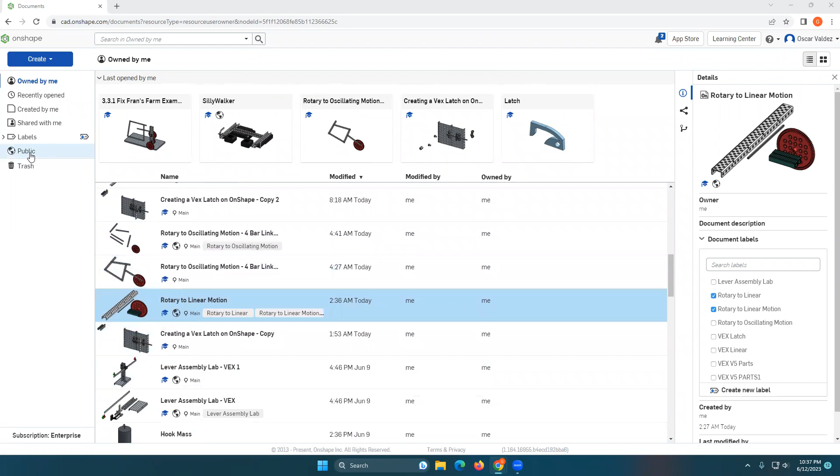We are going to create this rotary to linear motion assembly on OnShape with VEX components. If you do a search in public of rotary to linear motion, you should find the one that I've created here for you so you can copy this to your own account and follow along with this video. Let's go ahead and jump right in.

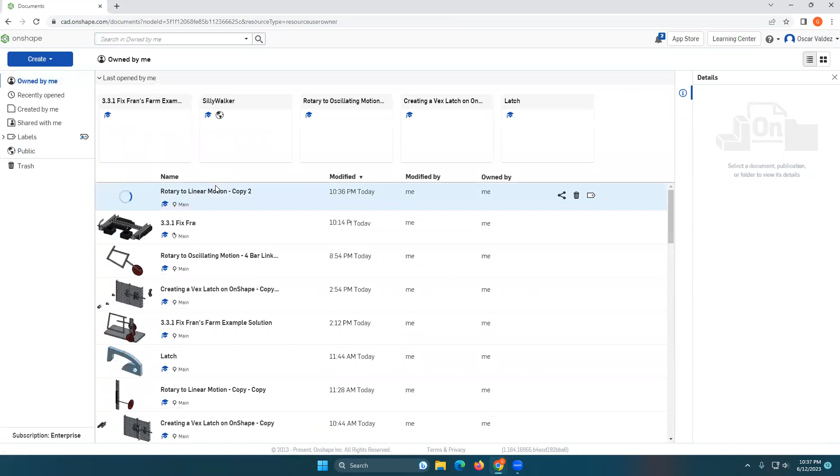So I'm going to head back here. I have created a copy of it. If you open up your copy and you don't see anything, go down to assembly. And here are my components. First thing I'm going to do is I am going to take these racks and I'm going to place them onto this C channel. There is a linear motion kit with VEX, but I didn't happen to find it in the library when I first initially did this. But I also didn't search very hard.

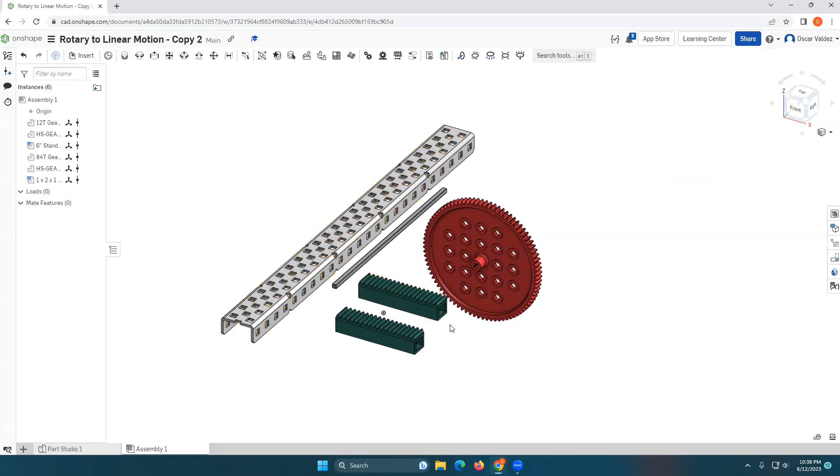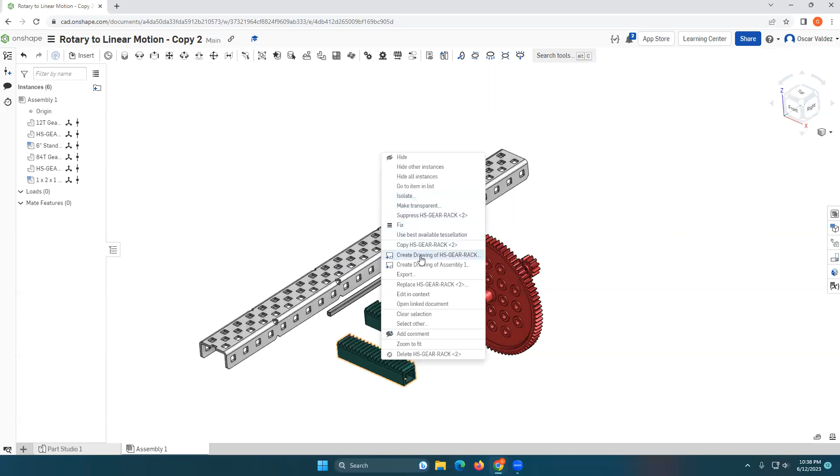So anyway, the whole idea here is to understand how we can create linear motion from rotary motion. And so I'm going to go ahead and just demonstrate that with these components here. So what I'm going to do is add a couple of additional racks. I'm going to right click and I'm going to copy and I'm going to paste. These parts I did not find in the VEX library that we downloaded previously. So what you can do is you can actually search for HS-gear-rack in the public library and you should be able to find these components here.

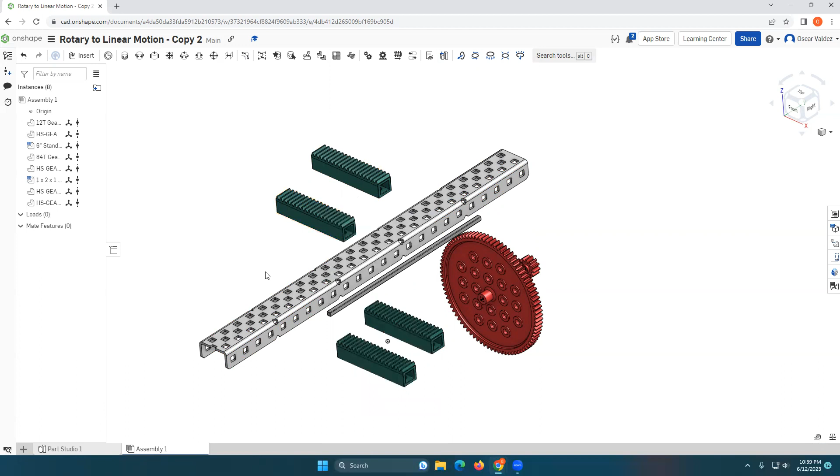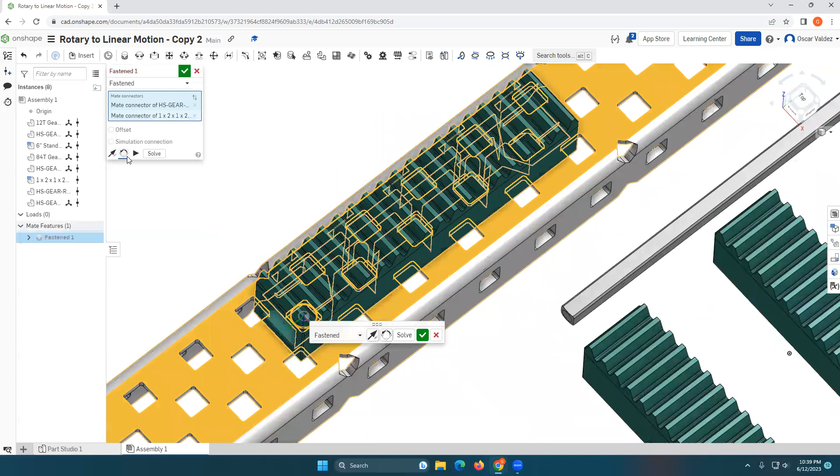All right, so what I'm going to do is I'm going to go ahead and just do a fastened mate between, let's say, the center of that and the center of, I'm going to hold the shift key again and grab the center. I'm going to do a quick rotate, click OK. I am good to go, and all the holes should line up. Beautiful. All right, I'm going to do the same thing for the other ones.

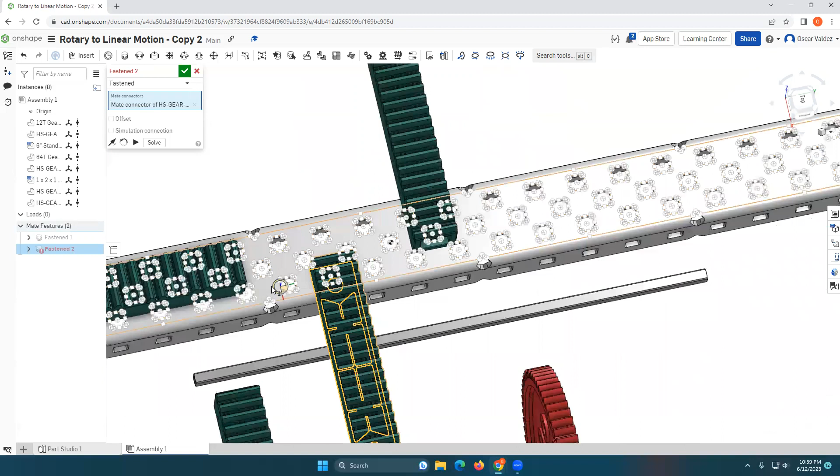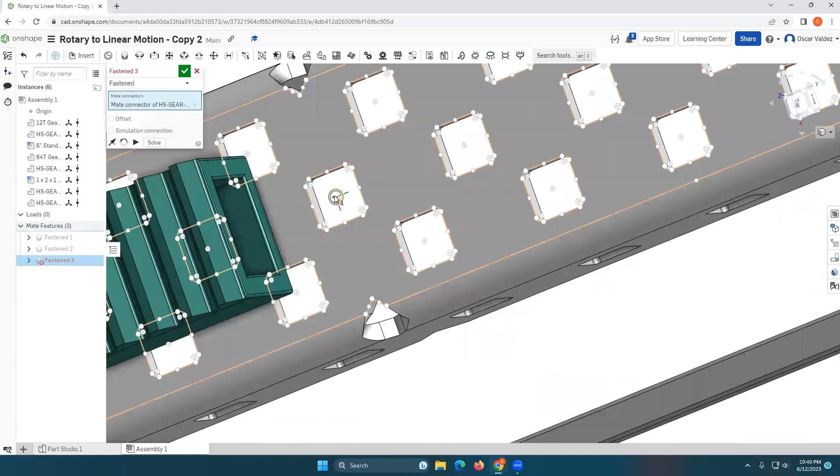I'm going to do a fasten mate. I am going to snag the center of that by holding shift. There we go. And then I'm going to hold shift key and snag the center of that. Rotate, rotate, rotate. Beautiful. And then I'm going to go ahead and do a fasten mate. Grab the center of this one here. And then place it holding shift. Grab the center of this one. Rotate, rotate, rotate. Check mark.

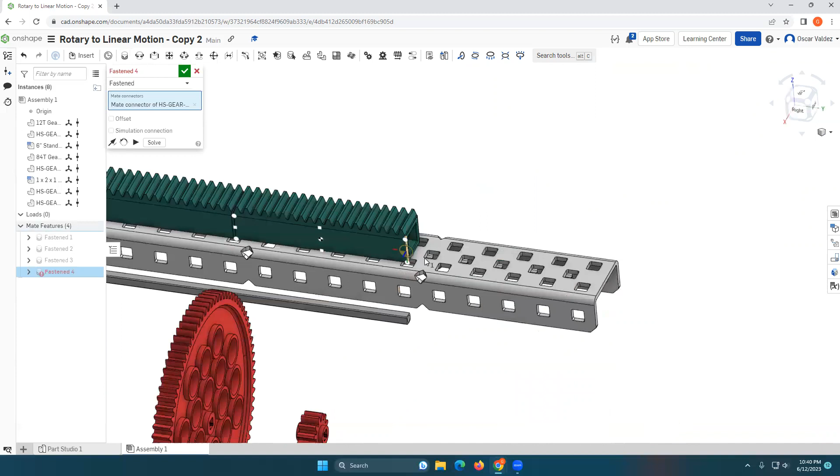And I believe I have room for one more on the other side, so I'll go ahead and add this one. Revolve, or not revolve, excuse me, fasten mate. Anyway, we go to select the center of that. And then the center of this. Fantastic. Let's rotate, rotate, rotate. Beautiful. Okay. So one of the things I can do, let me get the gear out of the way.

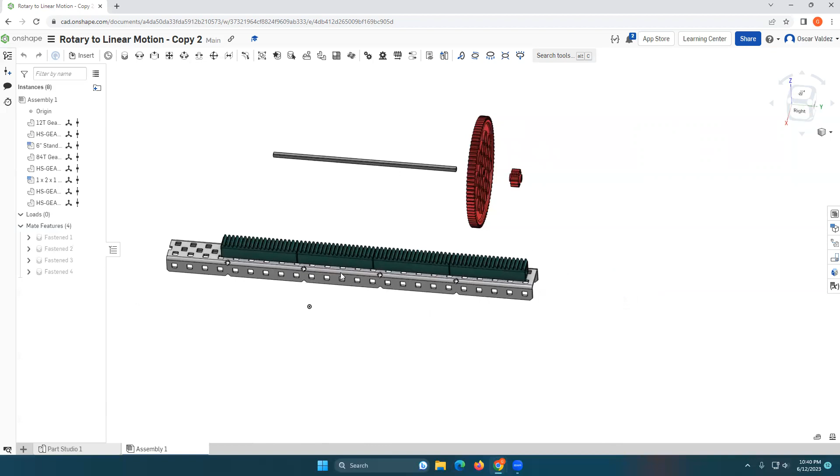The little gear and this axle, this shaft, is I can go ahead and create my slider feature. So I want this to slide left and right. So I'm going to go ahead and select slider mate. And what I'm going to do is I'm going to just grab the face of this. I'm going to click that. And I want that face to slide. We have this beautiful origin point here.

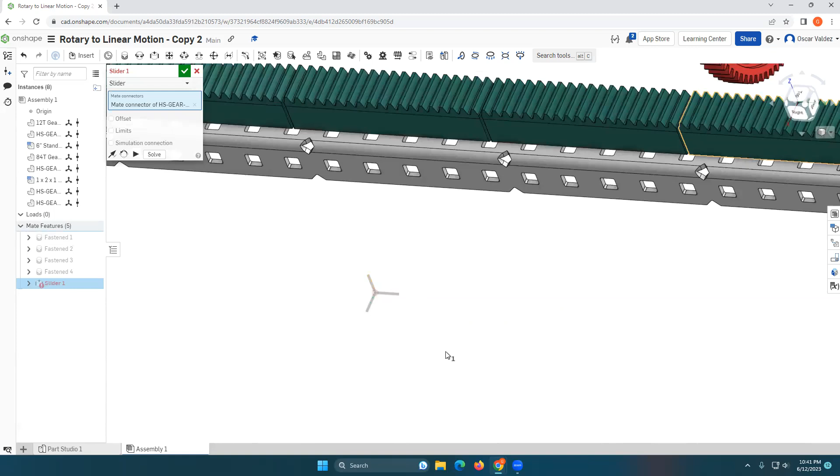As I hover over this origin point, I see that I've got these axes that I could select. I mean, hold shift key. So that way, if I move my mouse away, I still can see those. So I'm going to go ahead and allow it to slide on this axis here. And then I'm going to click OK. And when I do that, this has the ability to slide left and right on that axis. And that's it. Okay. What I can do is let me go ahead and click on slider.

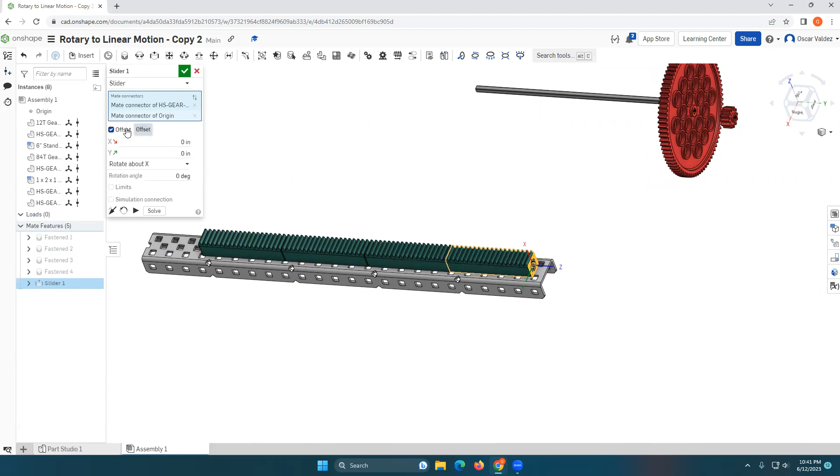Let me see if I can do an offset. And I'm going to drop this down just a tad the other way, just so I can get it out of the way so I can access this later on.

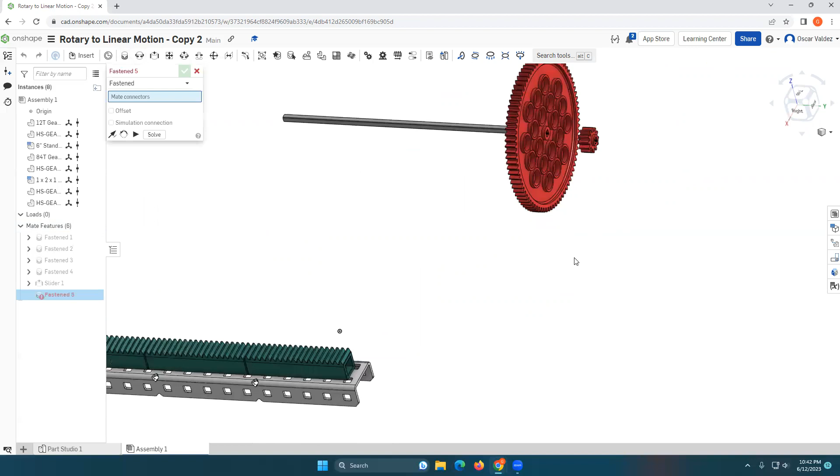All right. What I'm going to do now is I'm going to fix these gears onto this axle by using a fasten mate. I want the axle and the gear to rotate as one. And so I am going to fasten them so that they move together. And so let me rotate this so I can see this side. There we go. Hit OK.

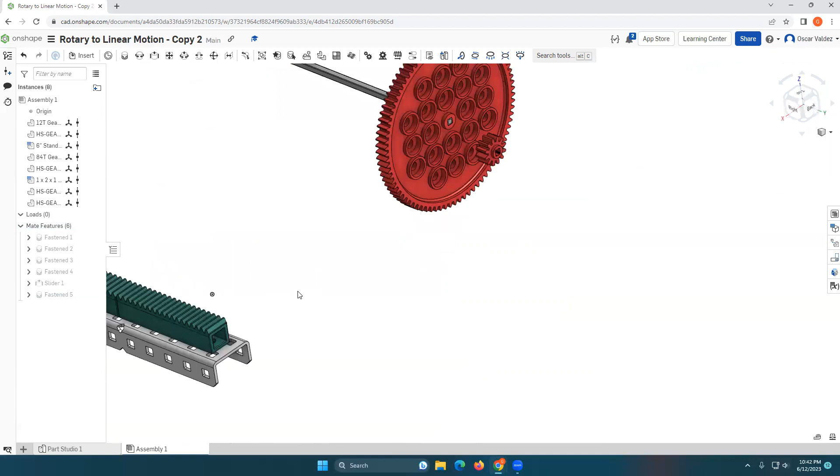And then I'm going to do the same thing on the other side. So I'm going to do a fastened mate. And I'm going to select that. And bring that over here. I'm going to flip it. There we go. Okay.

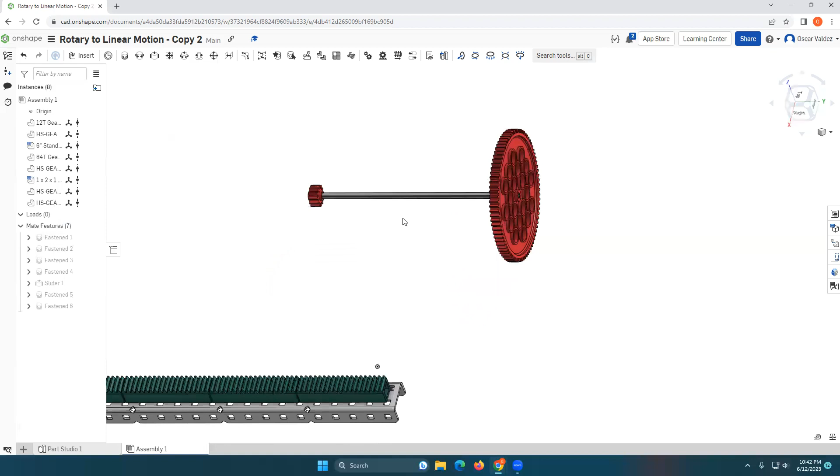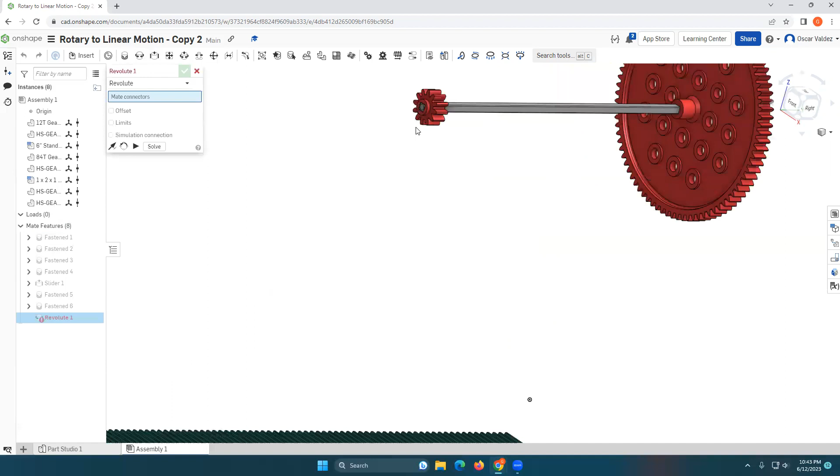Now what I want to do is I want this to revolve. I'm going to create a revolute mate, so that way this can rotate in relation to a plane. So what I'm going to do is use my origin again to create that revolute mate between the center of this. And this is going to get tricky, so make sure you select the right plane.

I want the plane, imagine you slicing this right down the center here. So you see how this circle is kind of slicing this in the middle? We want to ensure we select that plane from this origin. So this is laying flat on the ground. That's not the plane I want. So let me hold the Shift key.

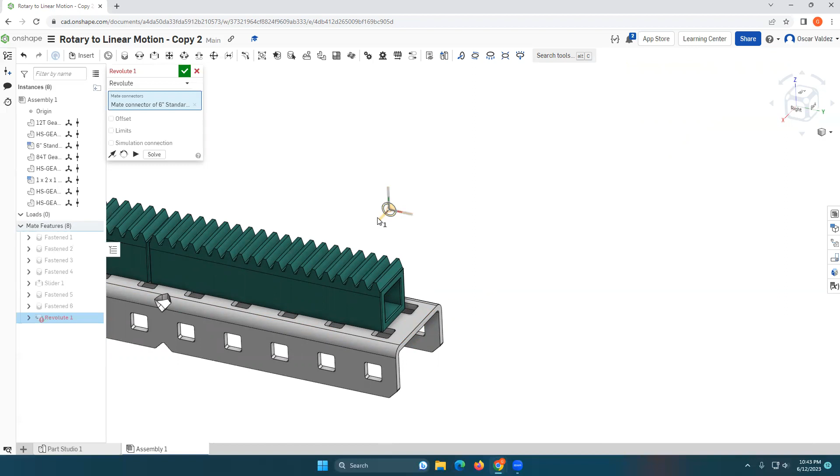And as I move around, I can see the planes generate. And what I want is this plane here. So let me go and click that. Click OK. Let me go ahead and see if I can flip this. There we go. Okay. I'm going to flip that the other way.

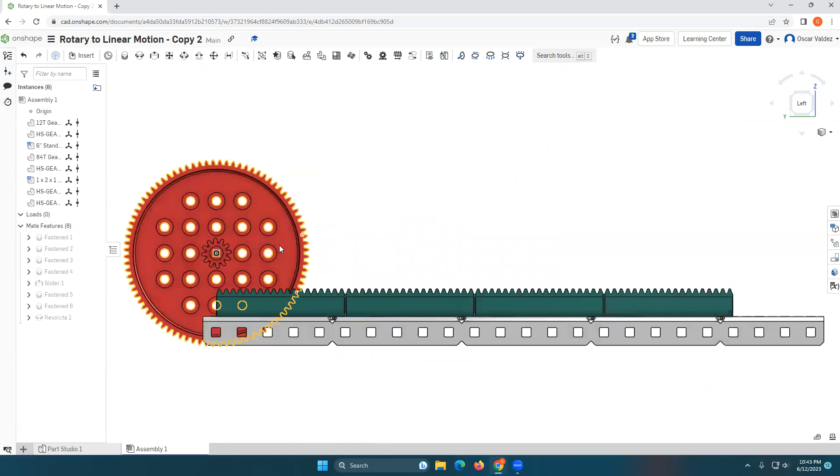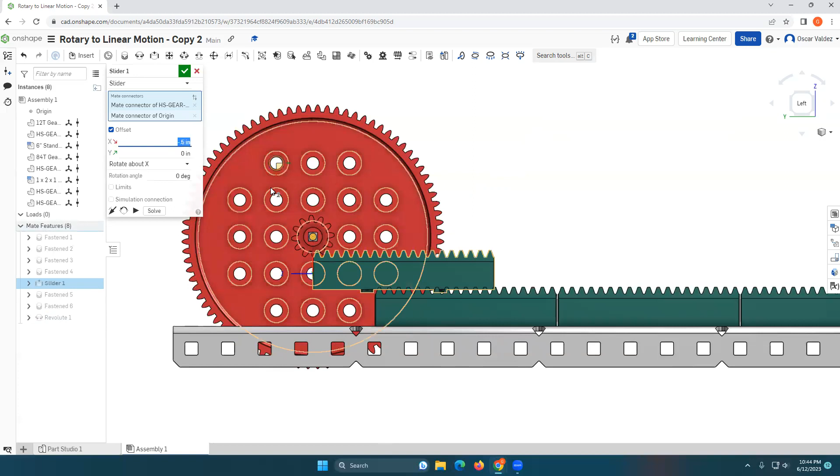Now what I'm going to do is take a look at this from the back side. And I'm going to slide this over. And I'm going to double click or right click, edit my slider feature. And remember, I brought that offset down. What I'm going to do is bring it back up so that the gear teeth mesh together. So I'm going to do negative, let's try 0.5, see what happens. Ooh, let me click OK and see what that does.

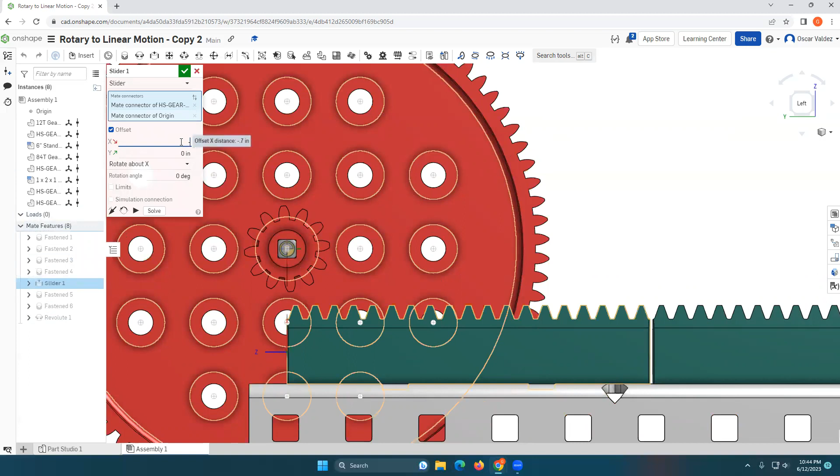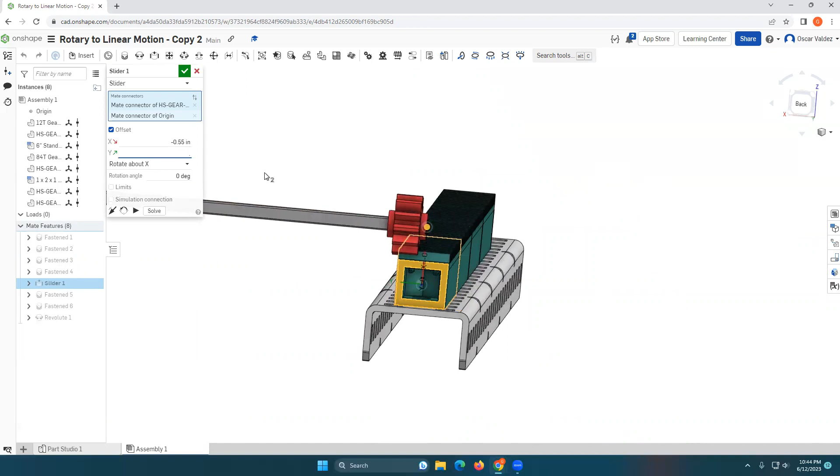A little too far. So let's try changing that to a negative 0.7. Is that too far? That's way too far. Let's try this. That looks pretty decent. Let's rotate it from the side here. They are meshing. I may want to do an offset in the Y direction ever so slightly. Let's try 0.2 of an inch. There we go.

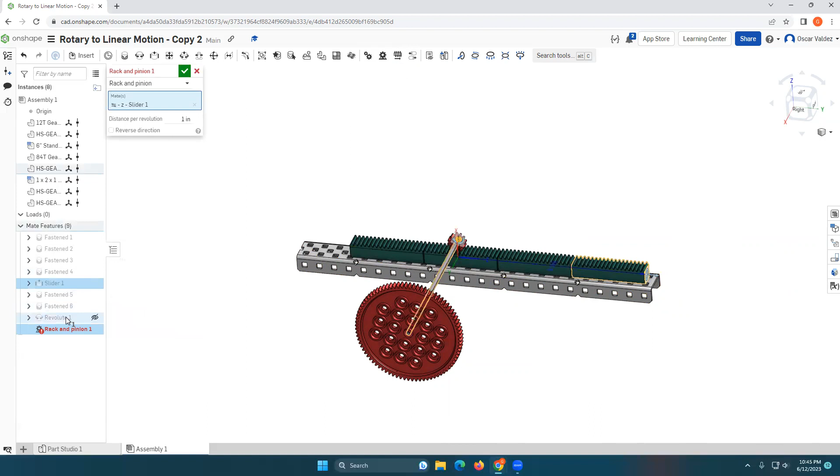And so this should slide left and right, but I need to create a rack and pinion relation between this revolute here and this slider. So I'm going to go up here to rack and pinion relation, click on that. I'm going to select slider, and then I'm going to select my revolute, and then I'm going to click OK.

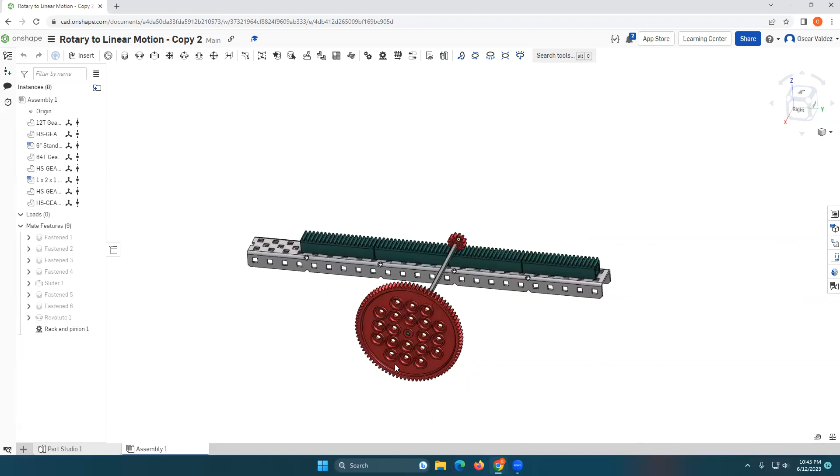And at this point in time, I should have, oh, there we go. Look at that. So I click on this, I rotate it either direction. I have that beautiful rack and pinion relation, and I'm converting rotary motion into linear motion. I can animate that by right-clicking on Revolute and going to animate, and I can go ahead and leave it in reciprocate mode. Oh, kind of off of my rack there.

So let me change this to a starting location at maybe negative 720 and value of 0. Let's try this. There we go. And increase the number of steps to slow it down. So I'm gonna.